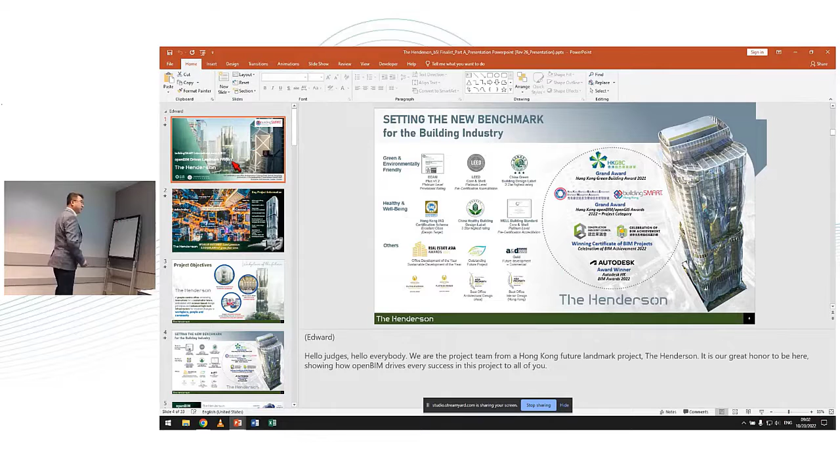We have a big team here in Montreal, and we also have the online team from Hong Kong. I'm representing the property developer and owner of the project building, the Henderson. We also have our close partners here, including our main contractor, our design architect, project architect, and a number of BIM consultants. The building is at a premium location in Hong Kong.

It's at the intersection between the Central Business District and the government headquarters, still the most expensive land in the world in terms of gross floor area per meter square. The Henderson is a super grade A office building, now undergoing construction, and will be a new icon of Hong Kong.

People-centric design and sustainability are the project objectives. We bring many high-tech infrastructures and innovations, with a science-based design for our building. Our ultimate goal is to create a workplace for the future that will benefit not just our tenants, but also their individual staff, and the people and community.

The project has already been widely recognized by many top-tier international, national, and local awards and accreditations at the highest ratings, including, just early this year, the buildingSMART Hong Kong openBIM, openGIS award, as well as some government-initiated BIM awards and an Autodesk award.

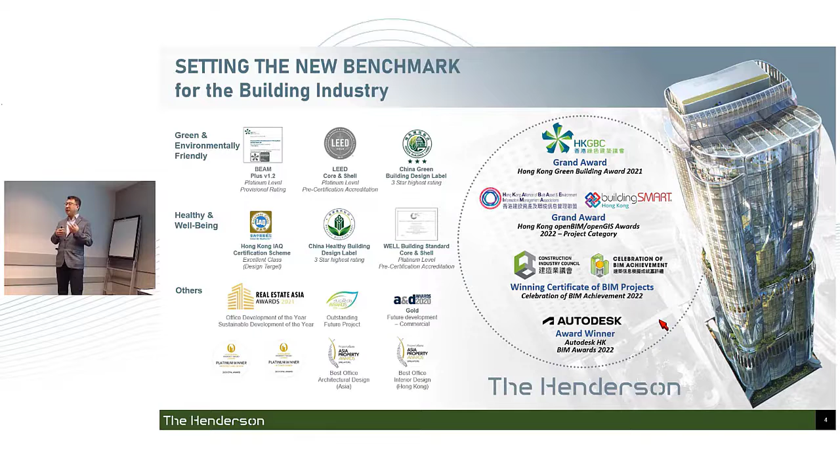Over the past few years, our project team has been conducting many knowledge-sharing sessions and technical talks to industry peers and practitioners as a matter of experience sharing with the industry. We have a strong and big BIM team from the beginning of the project.

The leading BIM consultant was responsible for setting up the BIM implementation plan, including openBIM and a common data platform. The consultant also had to take care of all the sub-consultants focused on different parts of BIM, like the one specializing in DFMA, who worked together with our design architect, Zaha Hadid, here, for the sophisticated double curve curtain wall.

We also have our MEP specialist consultant taking care of MEP design and MEP BIM. We carried forward the 3D and 4D model and all the building asset data and information into the construction stage. Our main contractor, Hip Hing, is responsible for implementing openBIM and bringing together all the sub-consultants, subcontractors, and suppliers to have an integrated BIM model.

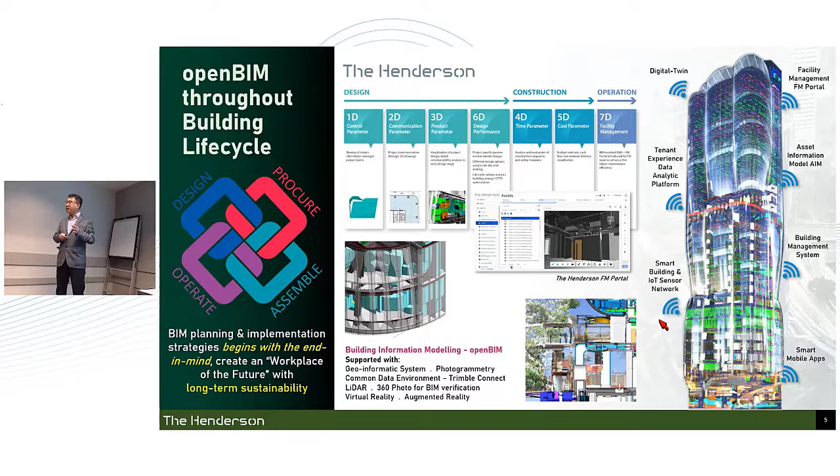The model is not going to end at construction; it will be carried forward and integrated with the digital facility management portal, forming part of the digital twin. Because we have so many sophisticated systems, our digital twin is going to link up with Hong Kong's first ESG partnership program.

Through the system, we can get all the building operation data and even users' ESG behavior data, which we can analyze in our analytics system. That's a loyalty program for future tenants, their individual staff, and our property management. So that's the end of my introduction. Thank you.

Hello, I'm from the architect. The architectural approach for the Henderson is in response to the site conditions. Its organic and smooth language comes to balance and suit the prominent neighbors in the area, with a monolithic object without even one sharp corner.

The tower is elevated off the ground to plug into the network of pedestrian bridges and to create what we call a green oasis at the entrance area, connected to the adjacent park.

To tackle the tight footprint and the notoriously high wind loads of Hong Kong, we had to adopt new technology in the industry: a heat-strengthened, doubly curved, large-scale unitized glazed system. This comes, however, with a whole new set of constraints which we would not have been able to manage without the early and holistic adoption of parametric 3D modeling tools.

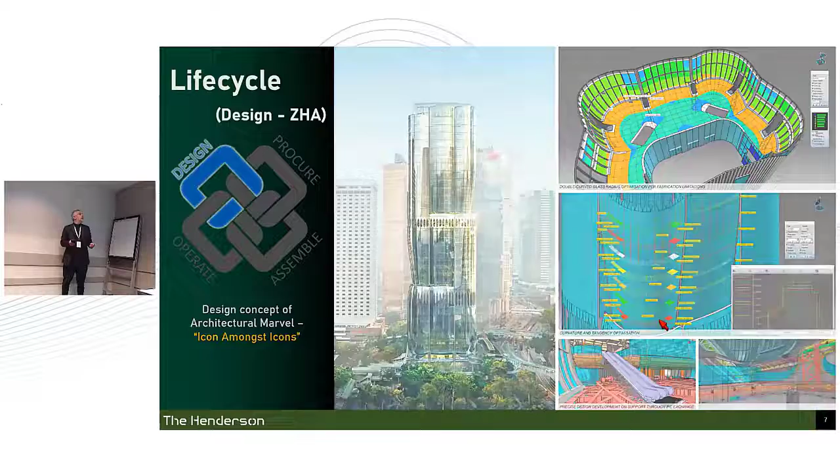The project massing and facade system were fully developed in Digital Project from the early design stage, which allowed us precise control of the geometry and curvature up to manufacturer limits. We could do real-time dimensional tracking and control, adaptive rationalization, and quickly respond to any cost evaluation without the need for design compromise.

IFC format exchange allowed us to work in tight coordination with the other trades, allowing us to design accurately on supportive 3D. Together with our sub-consultants, we developed the whole facade system in LOD 350 for tender to prove its workability and to allow bidders to accurately assess the complexity of the project.

This coordination is ongoing in the construction stage as well. We are currently reviewing and approving well-coordinated shop drawings in LOD 400, and we are still able to react to any ongoing challenges and changes.

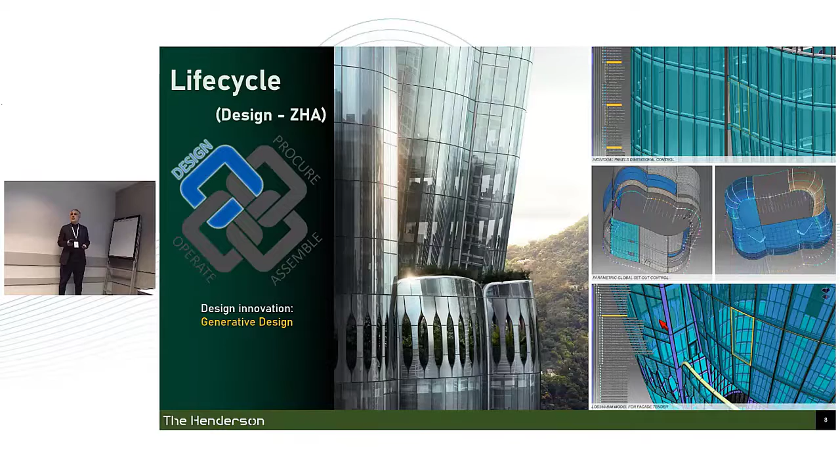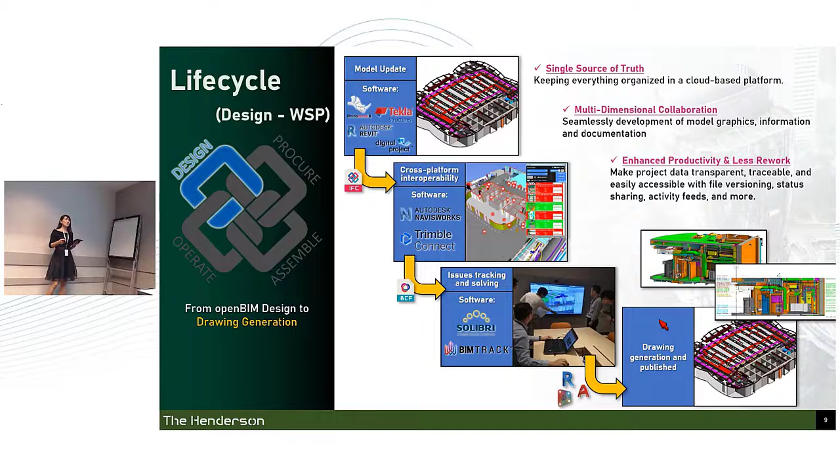From the design stage, building information can be developed with the highest integrity to facilitate direct drawing generation and detailed 3D geometry for future representation use. We hope to maintain a single source of truth with multi-dimensional collaboration, which not only enhances productivity but also enables better project management.

In this project, we comprehensively adopt the IFC and BCF into our daily coordination. The team is very confident with the exchange schema, which is governed by buildingSMART with the IDM.

Before the project starts, our BIM manager will begin with the definition, the model view definition. That is to design what elements are to be used, what is to be included, and the exchange format as well. Then it becomes our project standard, followed by all project members.

This process recurs, and the information model will finally become an asset information model. The maintenance-related information will be extracted from the COBie and then imported into the FM portal.

Here you can see the project team has adopted five different native modeling tools ranging across different disciplines. Since the project team was already educated and guided with the openBIM strategy from the very beginning by our BIM manager, the team can define suitable software to be used at different stages towards an openBIM approach, and the selected native software must support information exchange of IFC version IFC2x3.

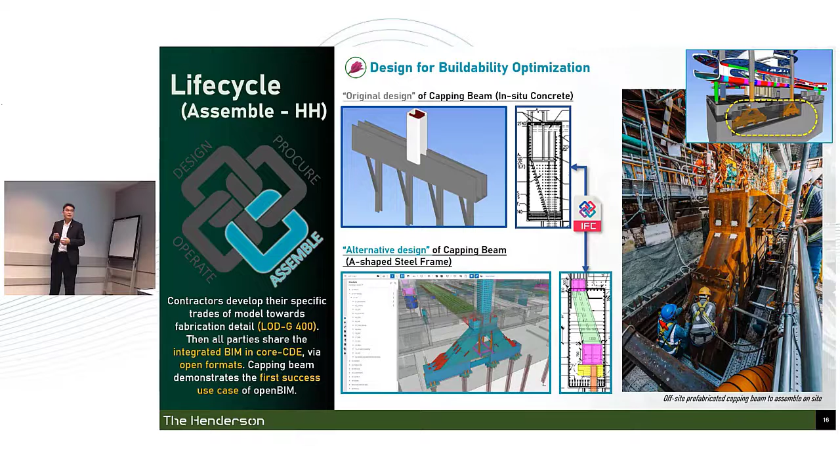The counter-proposed model is also interoperable with other platforms for reviewing and providing seamless communication. As a result, our construction time for the capping beam reduced around 20%, with equivalent loading performance, but easier workmanship and higher construction quality.

Our next showcase is the collaboration interfacing between the steel structure and reinforcement bar. We have the typical detail for rebar as normal practice, but in our projects we have steel structure in each floor.

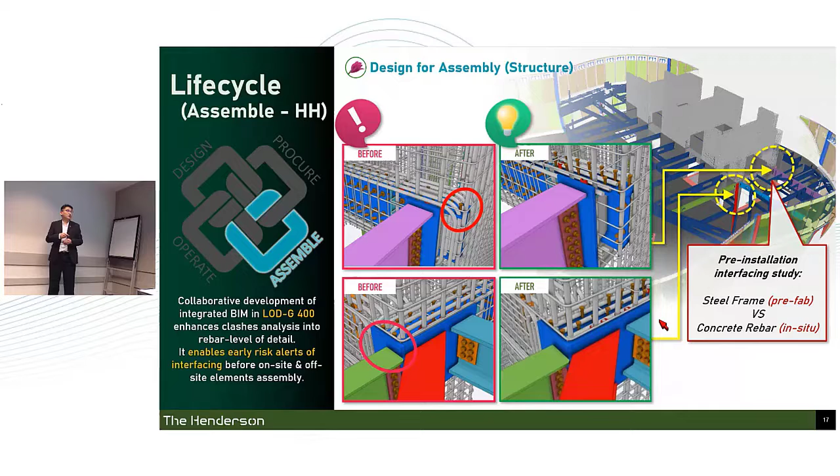We took use of the fabricated steel model in IFC format to review with our rebar model in the CDE platform. Our engineering team found that some rebar clashed with the steel structure, so we redesigned the detail before construction. This reduced a lot of abortive work on site during installation.

Next is about headroom. The clear headroom is very important to our Grade A office in a central business district. In our team workshop, we frequently work with our subcontractors to review the design to strike the balance between our buildability issue and

maximizing functional space. The IFC model allows us openBIM consolidation of models from all parties, enabling regular discussion and avoiding remodeling and discrepancy. As a result, you can see that most of the MEP routing fits into the floor truss.

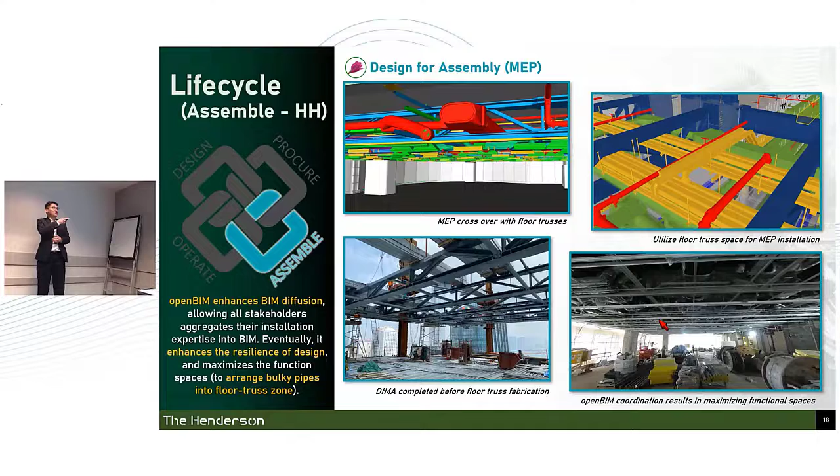The first one is automation. Apart from the API and the Dynamo application, the IFC model allows us to have more options to choose and fulfill our statutory rule checking, such as using Solibri for our staircase checking.

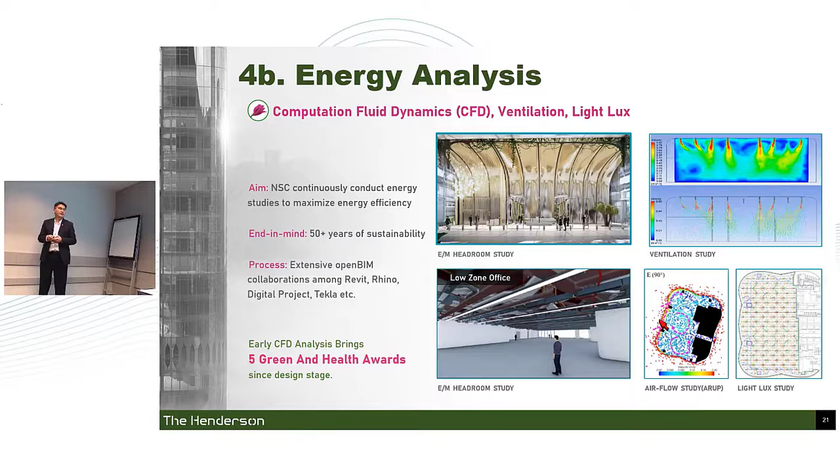Our consultant team and subcontractor do a lot of energy analysis to fulfill future occupation quality. They can embed their knowledge into the model, and the model is also interoperable between the design and the analytic software.

Based on the federated IFC model, we succeeded in modeling around 70% of irregular facade curbs, which reduces around 30% of construction time.

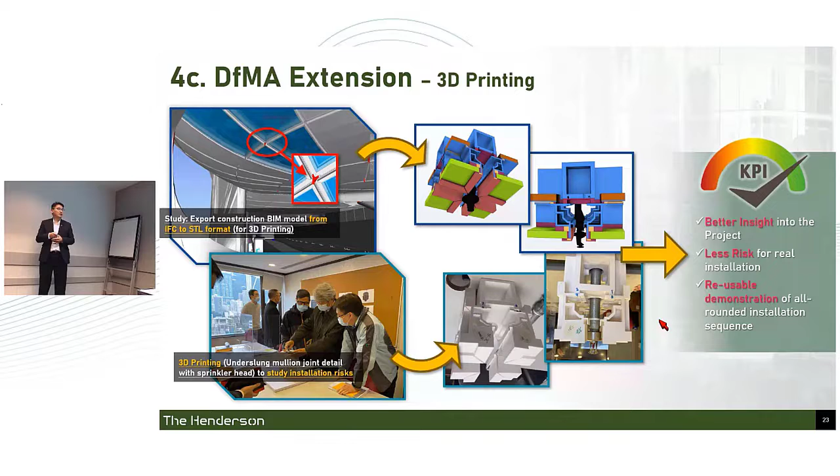Our model is also converted to a 3D printing machine, and the 3D printing model allows us to have more interaction with our project team to create a better insight into the project.

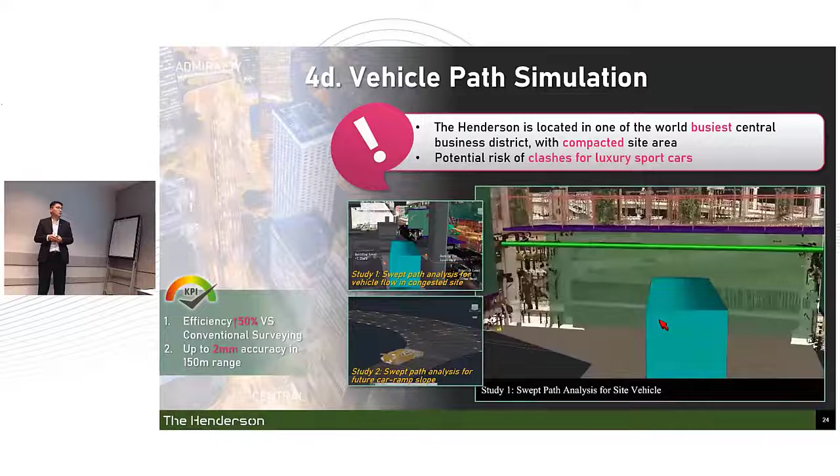To achieve a smooth driving path, our model is converted into vehicle swept path analysis to provide smooth vehicle movement.

Thank you, Kane. In the Henderson, we adopted 3D laser scanning to obtain precise data for steel construction. This precision comparison,

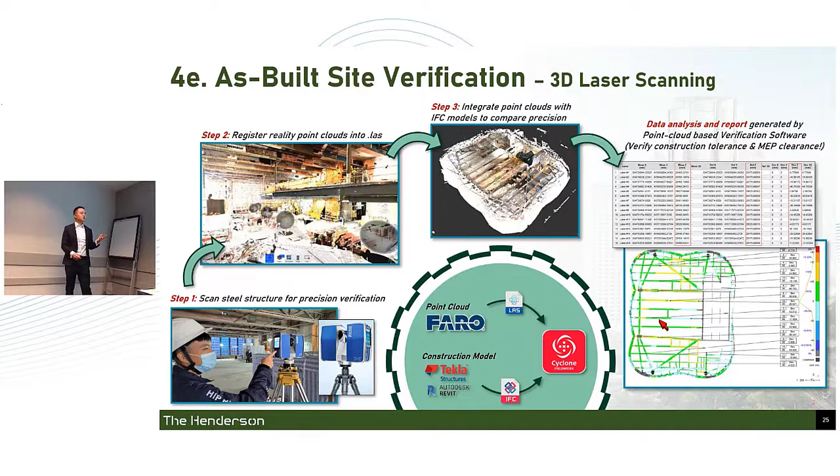to begin the precision comparison, we have to collect the point cloud model along with the virtual construction model by IFC format and import them into the Cyclone. This comparison is essential in our projects because the steel construction highly determines the future construction assembly tolerance and the MEP clearance.

To enable digital twin as the model for FM users, we initiate dynamic BIM collaboration from office to frontline. To achieve this, we provide in-house workshops for our site workers to adopt AR software.

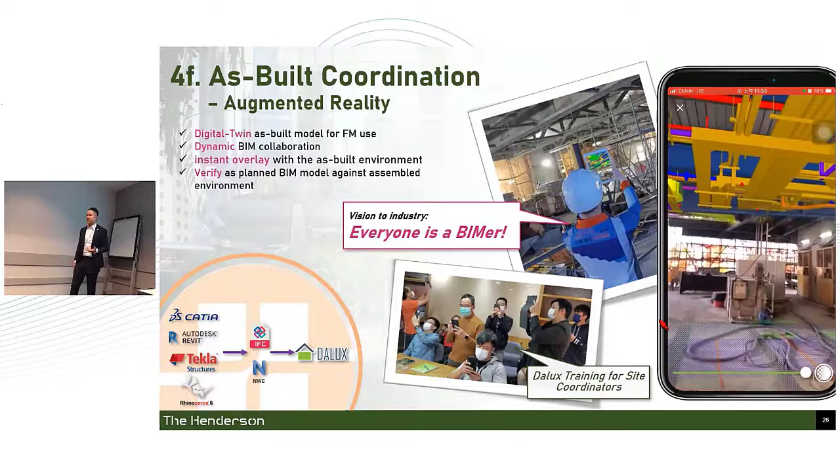Before the MEP installation begins, our building service coordinator frequently makes use of this function to plan out the MEP installation with the site workers. From their feedback, they find it really handy, especially the instant overlay with the as-built environment, so they can verify the information they're looking for.

We also make use of this function to verify the as-planned BIM model against the assembled environment to make sure everything is going as planned.

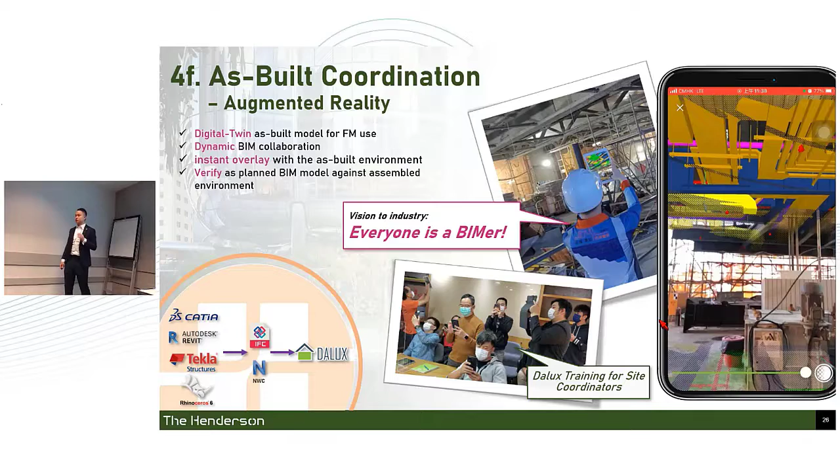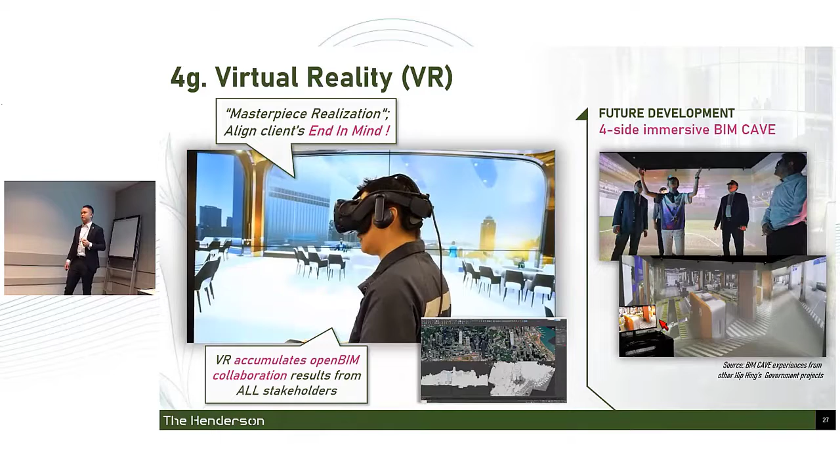To enhance it furthermore, we can implement BIM CAVE in the future, which allows stakeholders to collaborate seamlessly.

In the beginning of the project, we found it very difficult to obtain the site surrounding area information. So to tackle this pain point, we took the initiative to learn GIS to see how it can help our projects. This aspiration actually came from the buildingSMART Hong Kong chapter.

They have been working hard to promote openBIM and openGIS integration in Hong Kong. We are also working along with them with the aligned vision. Thank you, and I will pass it back to CC for conclusion.

Okay, so you have been hearing a lot of our BIM strategy so far, but adopting BIM in the project is not easy. So we would like to share with you guys some of our difficulties during the collaboration by using BIM. At first, we observed some data loss or mistranslation across different software.

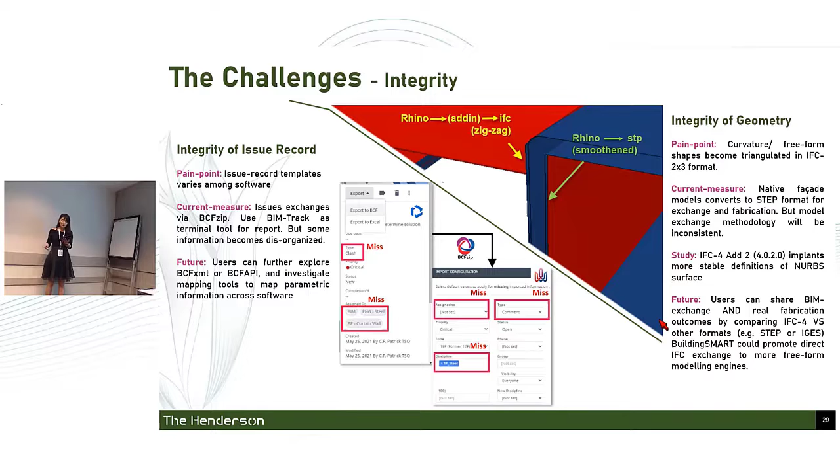Another challenge is related to the issue record. Because we were using the BIM track as a methodology for the report issuance, as the template is different among all the software, some of the configuration may be lost while exchanging via the BCF zip and become disorganized. So in the future, we hope to further explore using the BCF XML or BCF API for better information mapping across the software.

And in this project, we have been cooperating with over 25 project partners from local and abroad, and all of us possess high competency in our construction specialties. So with openBIM, it not only facilitates smooth exchange of data between all the parties, it also allows us to have a better collaboration around the world, especially under COVID-19 for these few years.

During the project cycle, we have implemented a lot of software with different objectives. openBIM allows us to select the right tools for the right task at the right time.

And finally, we are confident to tell you that our openBIM strategy over the delivery process will certainly contribute to future openBIM development, including the workflow. It also eventually brings us to witness the completion of the Henderson, a new landmark building in Hong Kong. And we believe that this project has opened a new chapter of openBIM and acts as a role model to guide the industry to use openBIM in Hong Kong.

We have devoted many efforts over the past 5 years. Now it's time for us to share the experience and honors with everyone here. And that's the end of our presentation. Thank you very much, and we hope to see you again next year.

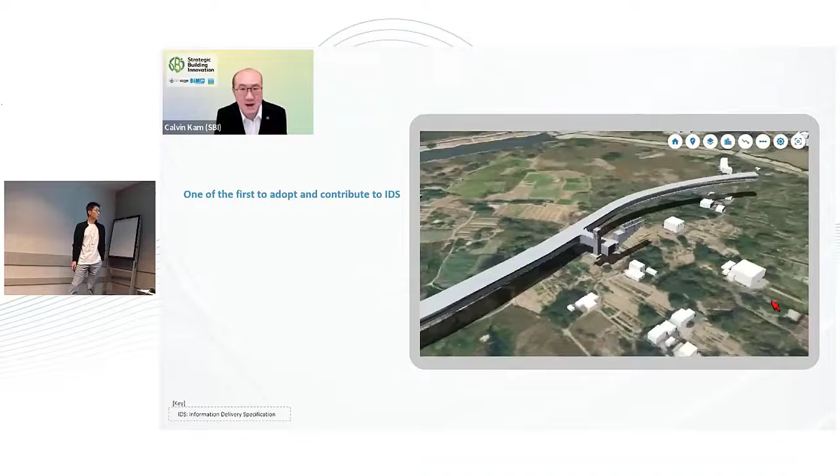But before we start, Calvin Kam, founder of SBI, has prepared a brief introduction to the project. Thank you, buildingSMART Awards Program, for giving our global project team this opportunity to present our submission under the Handover category. This submission is one of the first to adopt the new buildingSMART Information Delivery Specification, IDS.

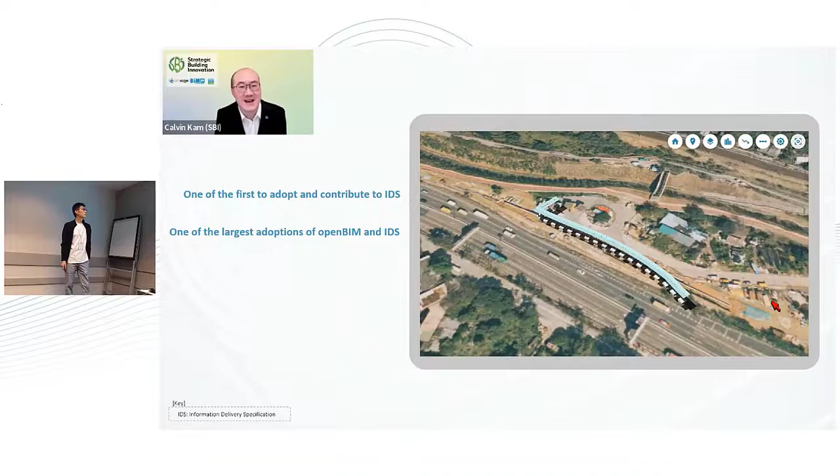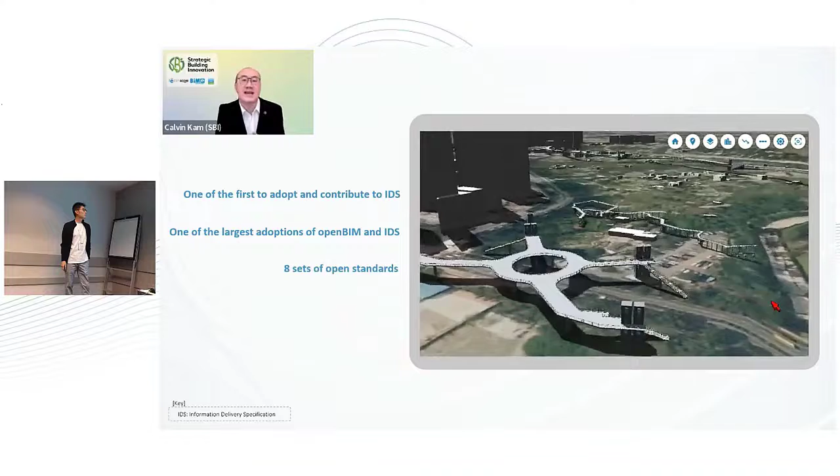This submission is about one of the largest adoptions of openBIM and IDS at an urban city scale. It's about the use of 8 sets of open standards working together in an ecosystem to ensure open standard driven, smarter city management.

In fact, our project team has a track record of over 20 years, whether working with the Finland government 20 years ago with Senate Properties, or working with the GSA 18 years ago to adopt IFC and MBD, or in the last 2 years working with the Hong Kong Lands Department. It's about pioneering openBIM applications and proving the value propositions.

In our case, we are not only the first to adopt IDS, but we are also actively contributing to the development and feedback loop of IDS. It's about the largest adoption of openBIM and IDS, designing beyond a single project, beyond one building or one piece of infrastructure. It's about getting ready to handle up to 300,000 project information models in the future. We are designing this infrastructure to be future bulletproof.

At the same time, it's beyond just IFC and IDS. We are working with a total of 8 sets of open standards, including OGC, the Open Geospatial Consortium, and CityGML, so that this ecosystem of open standards allows us to streamline open urban information as well as open building and infrastructure information. At this time, let me pass it back to Dr. Min Song to go through the project detail.

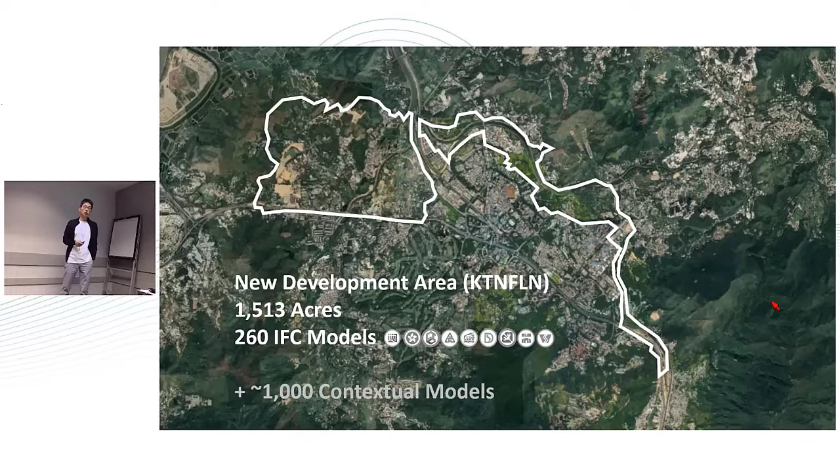Within that area, we had initially 260 IFC models coming from different works departments. But those weren't the only models we had. We had around 1,000 contextual models to give context in the GIS map. If you look at the whole area on screen, that's roughly 1,513 acres.

Going into the openBIM information, with that first batch of 260 IFC models, the government agency first published a BIM harmonization guideline. The downside is it's a human readable document that computers cannot understand. With this written guideline, you cannot precisely and digitally define your specification and check models against it. There's also room for human error, since people have to understand the written guideline and implement it into model checker software, and results may differ between people.

So that's when we turned to machine readable specification - IDS, the new standard established by buildingSMART in 2022, version 0.9 at this point. The intention of this standard is to make machine readable specifications interoperable between different stakeholders and BIM tools, so you can generate a specification from one tool and export it to another for model checking and other purposes.

Because today we do have machine readable specifications - it's nothing new - but it lives inside one piece of software that's not exported to other software.

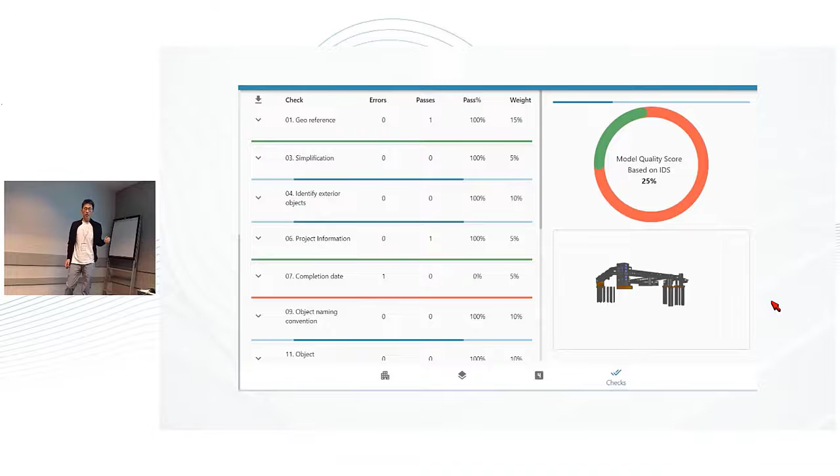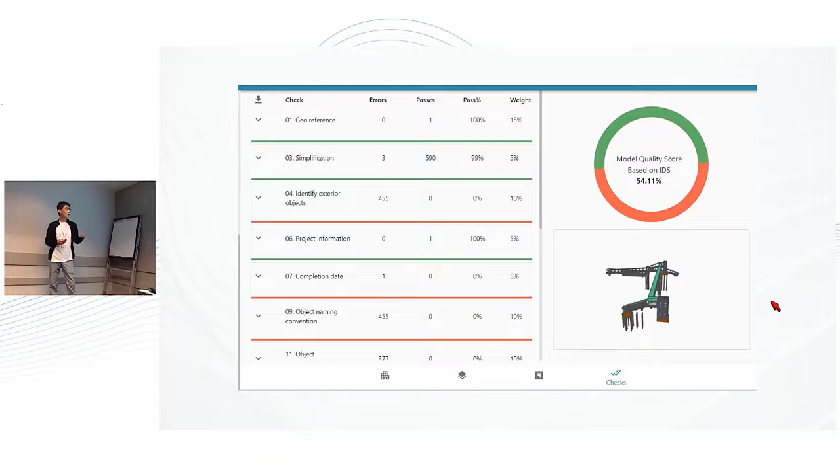This is the IDS checker that we developed after coming up with the XML format. It runs checks against IFC models, and here are some of the checks we implemented. It has high-level checks like construction start date and construction end date. Georeferencing is also important because you have to automatically locate the building in the context of the map.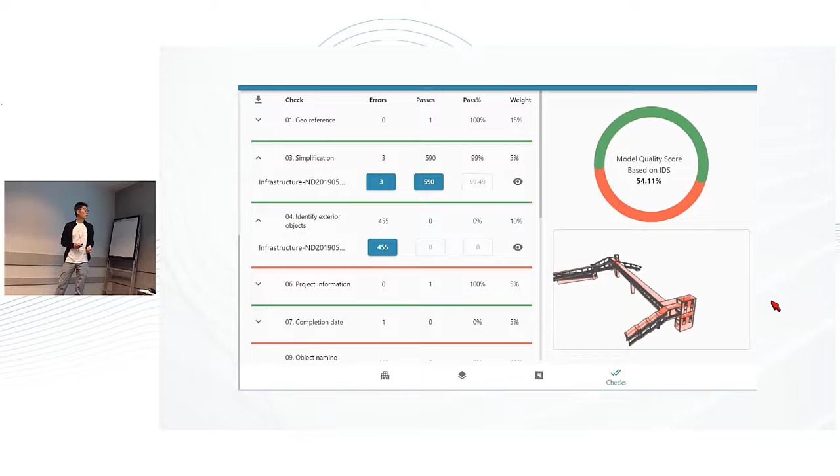After this IDS checker was developed, we tested it with 149 IFC models - building projects and infrastructure projects were tested. The maximum score you could get for an IFC model was 300 points, and the average score across these projects was around 150 points. Building projects scored higher compared to infrastructure projects, as you see here, mainly because today we have a very good definition of IFC structure for building projects, but infrastructure projects are lagging a little behind.

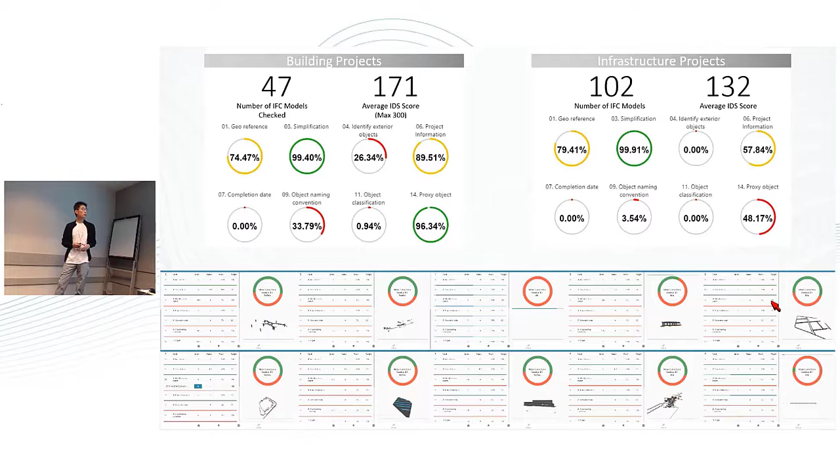We are also hoping to see IFC 4.3 in the future, and when that comes out and software implements it, and if there's an export engine that successfully exports IFC 4.3, we expect infrastructure project IDS scores to go up in the future.

The time it took to check each of the models was also pretty quick, around 20 seconds down to 12 seconds. Even with a fairly large project like the one on the left side, with 2,500 3D objects, it took around 10 seconds. For very large models with 100,000 3D objects, it does take longer, but on average it took maybe about 12 seconds.

Stepping back a little bit, a 30,000-foot view of our architectural system. The IDS checker using the open standard is here at the top, and the BIM data repository GPDR that I mentioned is this gray box at the bottom. But it's not only the IDS checker that we use open standards for.

We used, like Calvin mentioned, 8 sets of open standards or solutions. CityGML was one, the openGIS format. Then GLTF for data streaming to simplify the geometry and make that extremely fast, that is also an open format. And 3D tiles, that is also an open format.

BCF was used to communicate the check results with the authors. Then buildingSMART data dictionary, this is something not implemented or tested yet, but we plan to use this in the future when the IDS standard is mature enough to link the data from the BSDD. So you can see a lot of open standards were used, and this is possible because there is great support from the government agencies. Next, Christina Bloom from Architectural Services Department will explain government support for the open standards and implementation.

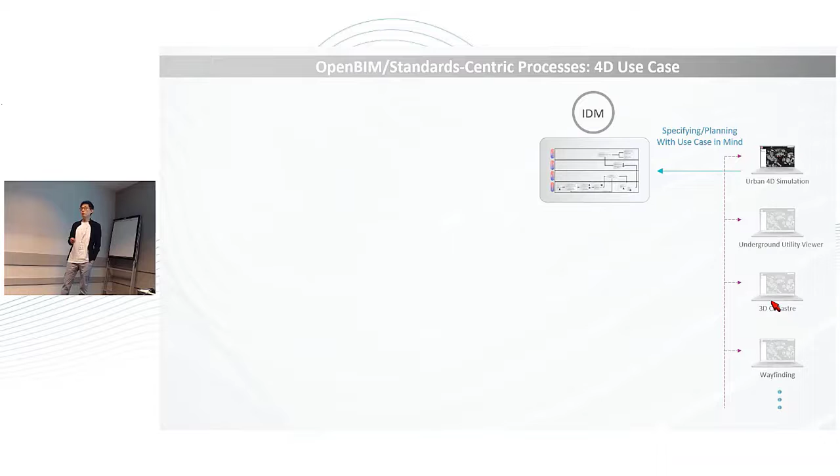Before developing this application, what we first did was identify the processes and information exchange between different stakeholders. Based on that, we really thought about the IFC entities, property types, and the values within the IFC model that would support the 4D simulation and openBIM and openGIS integration.

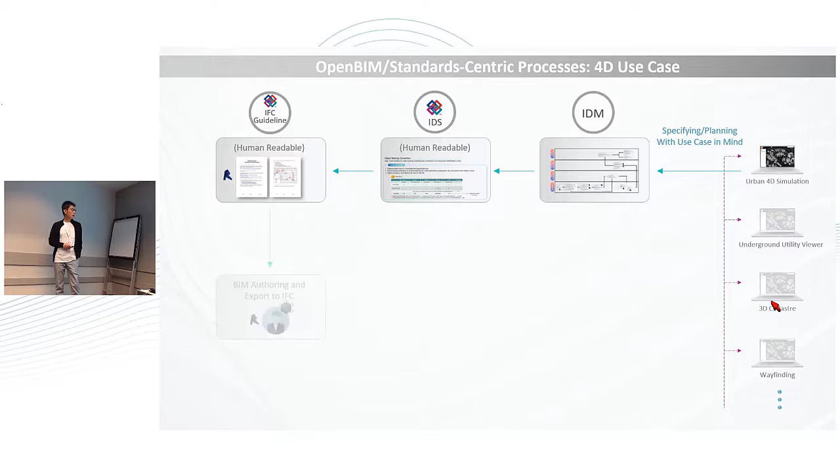Once we had that human-readable specification in place, it was also used to author an IFC guideline for Revit users, so that you can export IFC entities, properties, and values correctly from the Revit tool. The IFC guideline was used by the modelers to generate the information required for the 4D simulation.

The IDS in written format was converted into machine-readable IDS XML format, then imported into the IDS checker for checking IFC models. If issues were found, BCF was used to communicate those issues with the authors. When the IFC model is in good shape, it was handed over to the government BIM data repository.

The repository used additional open formats and standards for streaming the data. In the end, when the IFC models had all the required information items for the 4D simulation, that was materialized into the 4D simulation application.

So that is a typical workflow, but this is something applicable for other use cases that you see on the right side. This is the demo of the 4D simulation application.

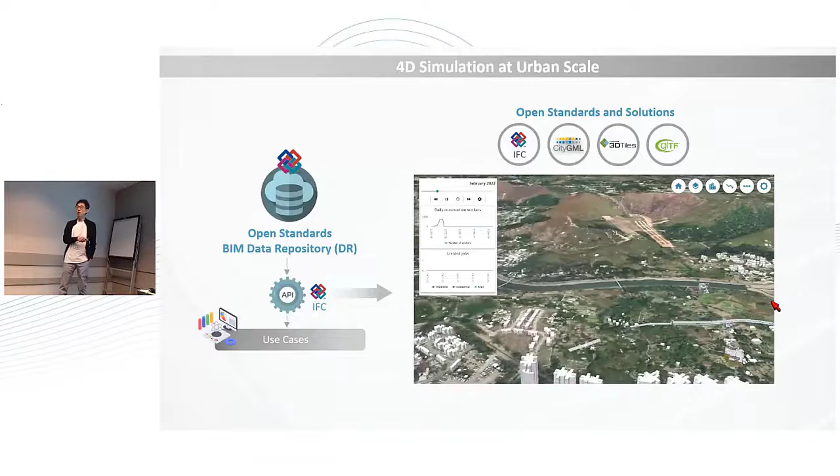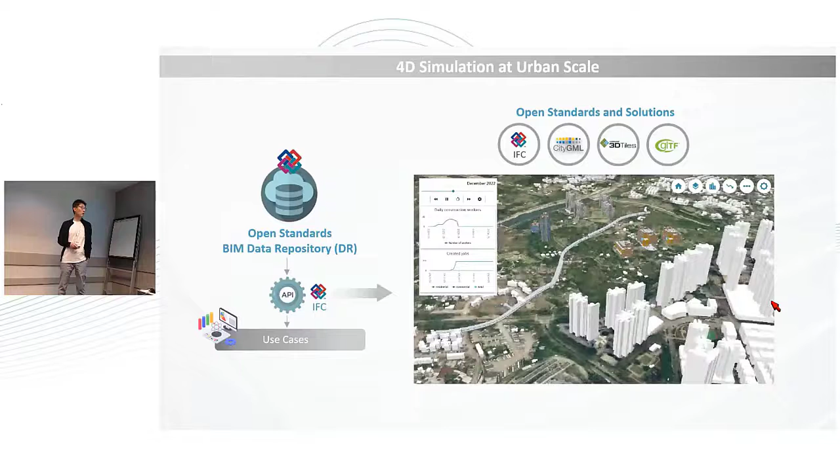You see the coefficient metrics on the graphs on the left side, like the number of workers needed per area, number of jobs created per area, linking coefficient metrics with the IFC slab, the area coming from IFC slab, and the total built area, and so on.

So, in summary, the IDS project used a set of open standards, not only openBIM, but openGIS and other open formats for streaming data. We developed 10 machine-readable specifications based on the new buildingSMART IDS standard, which were imported into the IDS checker we developed to test the models.

We used 149 IFC models in total, 47 building projects and 102 infrastructure projects. The time it took to check each model was pretty quick, about 12 seconds.

Overall, the objective of the IDS project was to make the data repository scalable, serviceable, and shareable, so that the handed-over IFC models meet the requirements for the GDDR, and ultimately give ownership of the data back to the client, the government agency, so they can archive, see the details, and develop applications from it.

We also wanted to make this process repeatable. If you have a GDDR with 300,000 IFC models and use proprietary APIs to build applications, that would be very difficult, with different documents and SDKs for different software. But when all models are based on IFC, there's only one IFC API you need to study to build applications.

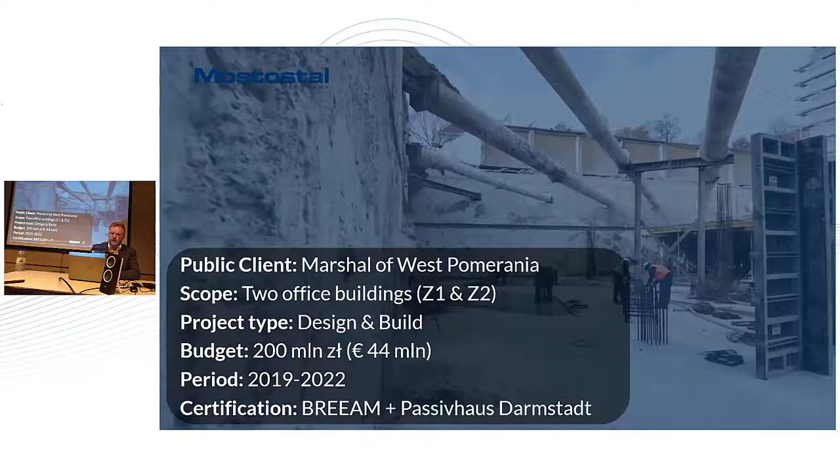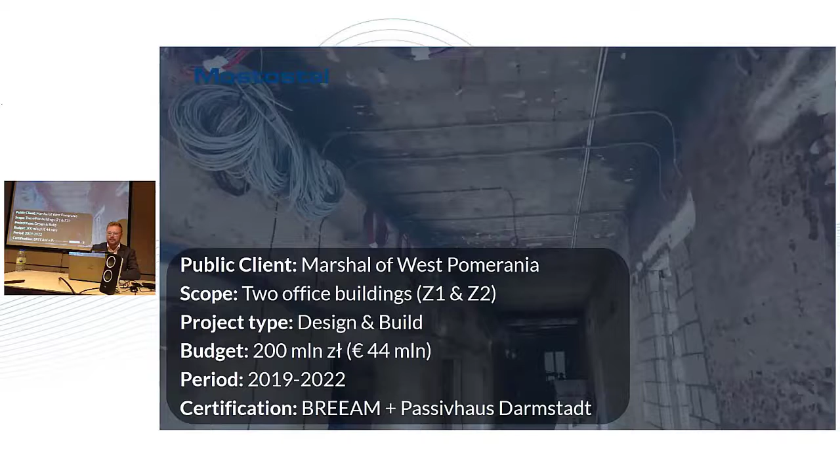Here you can see our project, Urząd Marszałkowski in Szczecin, built for a public client. It was a design-and-build formula, divided into two stages: the first was deep renovation of an existing building, and the second was new construction of a passive building. Both buildings required sustainability certificates.

To fulfill the client's needs, openBIM was used to reach sustainability goals. By using the openBIM framework in the design and construction processes, all sustainability and energy performance requirements were met. The client also required preparation of an as-built model and development and implementation of an FM platform for use.

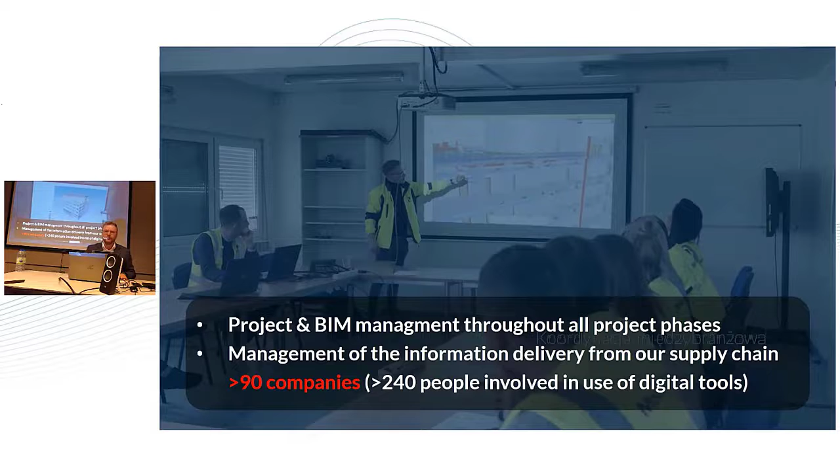Enough of introduction and goals, let's jump to the practice, to the construction site where all the work is done. I'd like to invite you to Szczecin, Poland. Construction sites are generally conservative environments following traditional approaches to working, but over here we are pushing the boundaries by using openBIM to improve our way of working, and I will show you some methods and digital tools we used to achieve that.

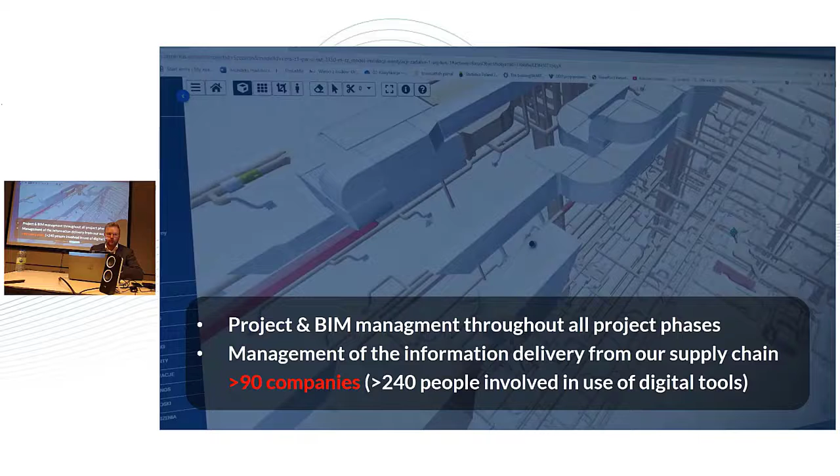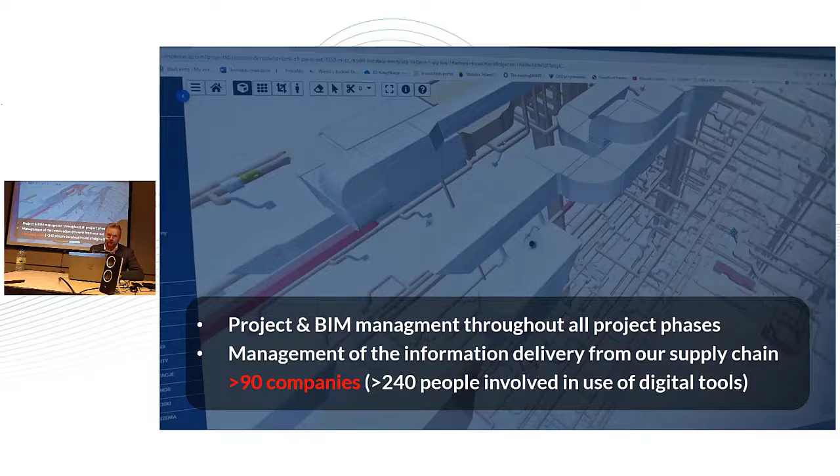As a general contractor, we manage the BIM processes from design until the handover stage and coordinate the work of multiple entities. In this case, more than 90 companies were involved in the project, including construction companies, designers, and suppliers. We also had more than 240 people involved in using digital tools.

From the very beginning, we had this idea that a finished product should be adjusted to the desired client needs, even if those needs were not well articulated. In this project, we realized to meet clients' expectations, we need to extend the BIM usage above and beyond the basic requirements that the client set up for us. Based on our earlier experience, we implemented extra BIM uses, and in today's presentation I will focus only on those required for proper handover.

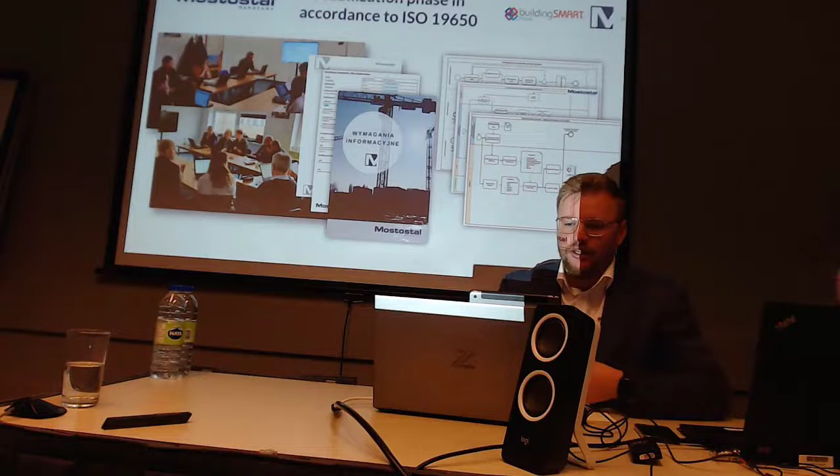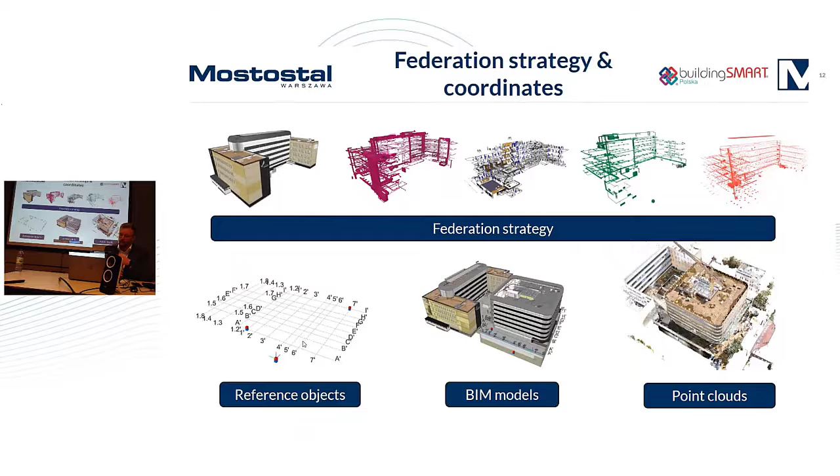So the next thing is that we also prepared a federation strategy and set up a coordination system for the models, and also prepared an implementation plan. We also defined modeling requirements and machine-readable information delivery specifications, which were later used for model setup and quality control.

Here you can see an example. We use internal classification in preparation for the FM platform. Also Uniclass, because the client required this, and it includes all the properties that needed to be implemented. And here you can see how it was done.

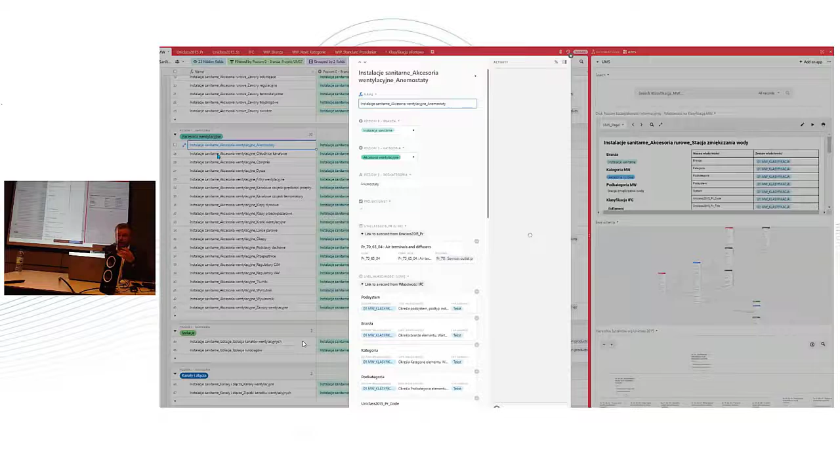We used the Airtable platform, which is a database software, we can say something like that. So we prepared our database. Thanks to this, we could have information requirements always available and up to date. And there you could see export to PDF, and also it was prepared for XML export for native software like ArchiCAD or BIM Collab for project.

Okay, so now I would like to go over the biggest challenge that we took on at our construction site, especially during the construction handover phase. It's about correct data acquisition. While the general process is simple to say, design, build, and operate, in practice it has been difficult to accomplish, especially during the construction stage, where it's challenging to coordinate the works on-site itself.

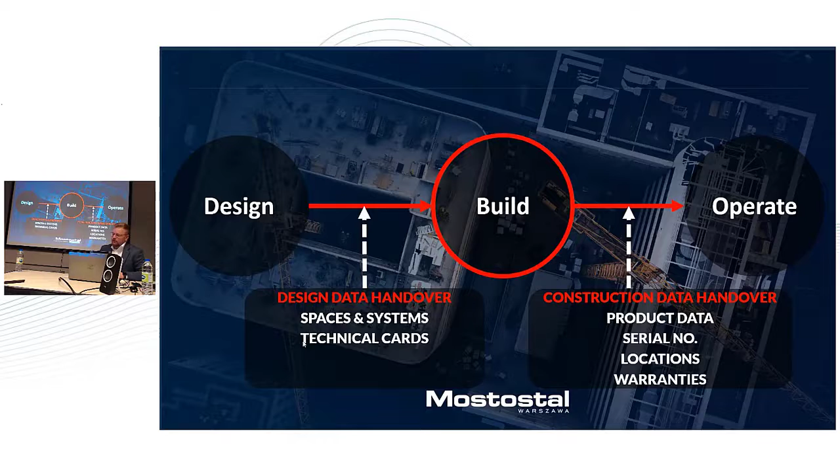But we developed some techniques to directly tackle this problem. And as I mentioned, we were responsible for the coordination of work from the design to the operate phase. Firstly, let's focus on the design stage and design data handover, which is part of the handover through the whole process.

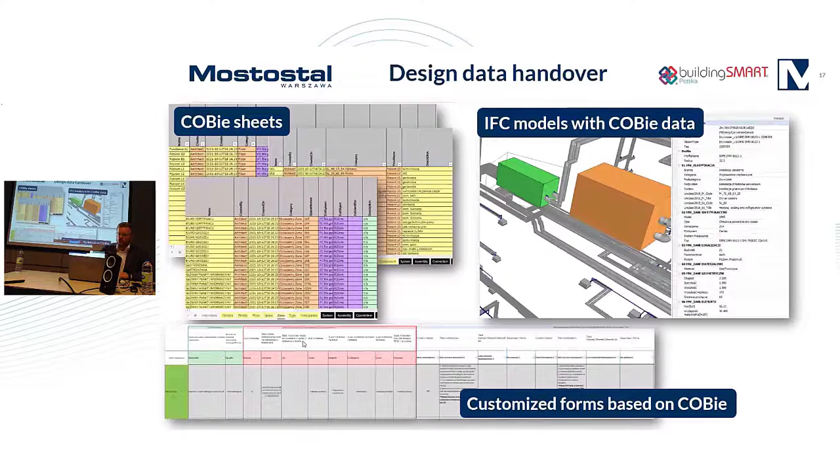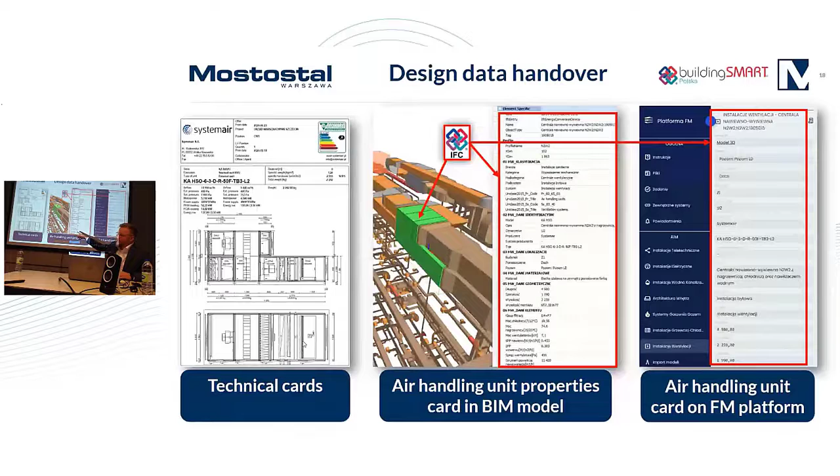The COBie format helps us to properly structure the data in the models, and not only in the models, because we used this data also during construction, which I will show you later. Designers extracted information from the technical cards and inserted the information directly into the models, and it was later used in the FM platform.

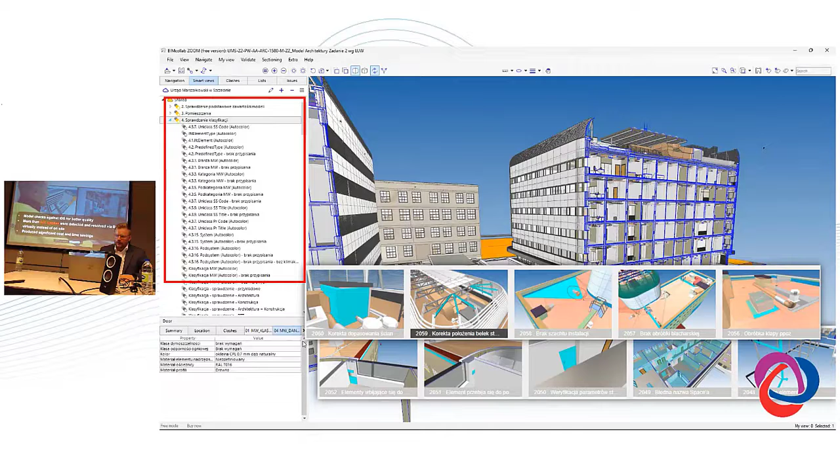From the beginning of the project, we also placed a strong emphasis on the quality assurance and control of design, BIM models, and data. We regularly performed quality control checks in terms of information requirements and COBie data. All issues were communicated using the BCF format by using the BIM Collab platform. And we managed to detect more than 800 clashes and resolve them virtually instead of on the construction site.

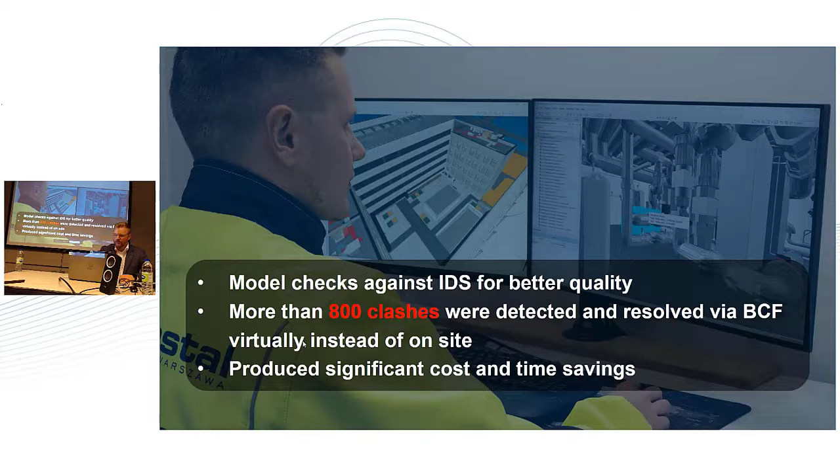Next, on site we were using a Dalux platform with access to the documents, all the documentation on site. Because of that, we reduced the risk of working on outdated documentation and improved access time to documentation to just a few seconds. This was especially crucial here because the construction office was located more than 1 kilometer from the construction site.

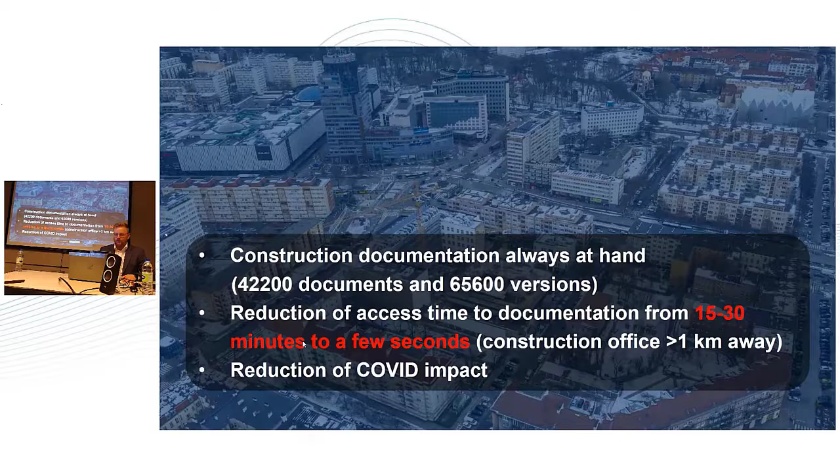That's why we also bought bikes for the construction staff on this project. It's not a joke - in one day, the project manager did more than 20 kilometers on a bike. I haven't mentioned this before, but construction was done mostly during COVID, which in the case of construction is more problematic than, for example, online selling or software development. So we also reduced the COVID impact because of implementing those kinds of solutions.

What we learned during the process: it is better to divide quality checks into sub-stages in order to bring crucial information to the site at the right moment. It needs to be checked more often in an iterated process. Also, COBie should be treated not as a final deliverable, but as a format to start the project with.

Our biggest challenge was construction data handover. Capturing data during construction is much more complex because there are many more people and many companies, each creating a small portion of the project data to be delivered. We had more than 90 companies to coordinate, and rather than just handing over the information from the execution stage, we aimed to properly understand the client objectives. We wanted the client to be able to use the collected information and documentation from the very first day of operation.

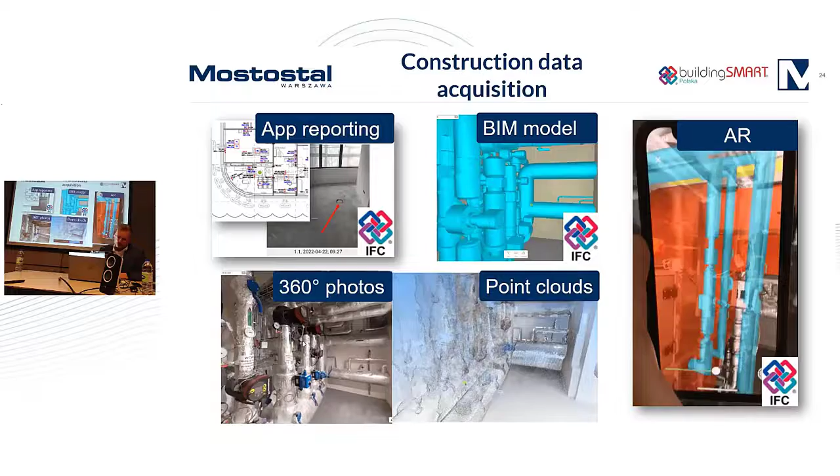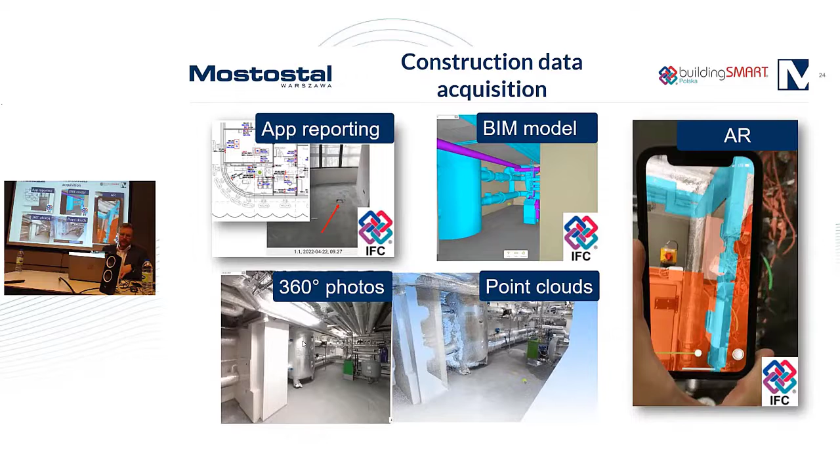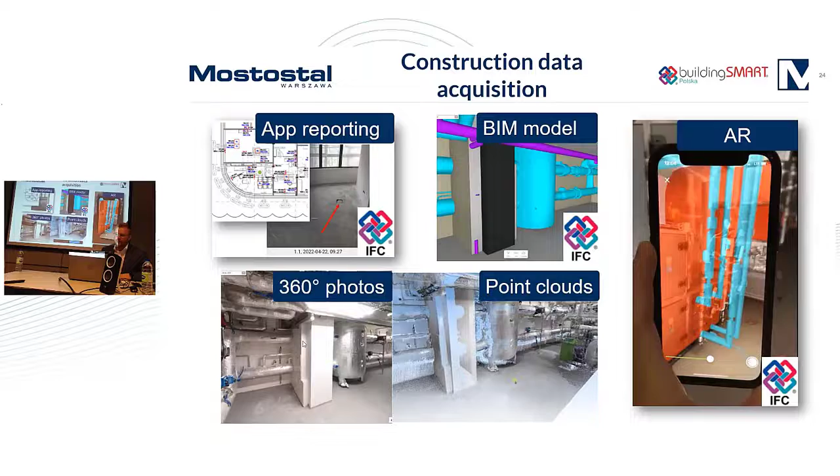In order to deliver an accurate as-built model, we implemented a series of methods. First is as-built changes registered on Dalux, which allows subcontractors to register any changes spotted on the construction site, and it was for workers on a construction site. We also used 360 photos, fast laser scanning, and BIM models, and we tested augmented reality on this site.

Here you can see an example of use of the Dalux platform, where we had a digital form for data collection. A subcontractor could select a location or BIM element, take a photo of a serial number, and send it to us. After this, we could combine that data and use it in the FM platform.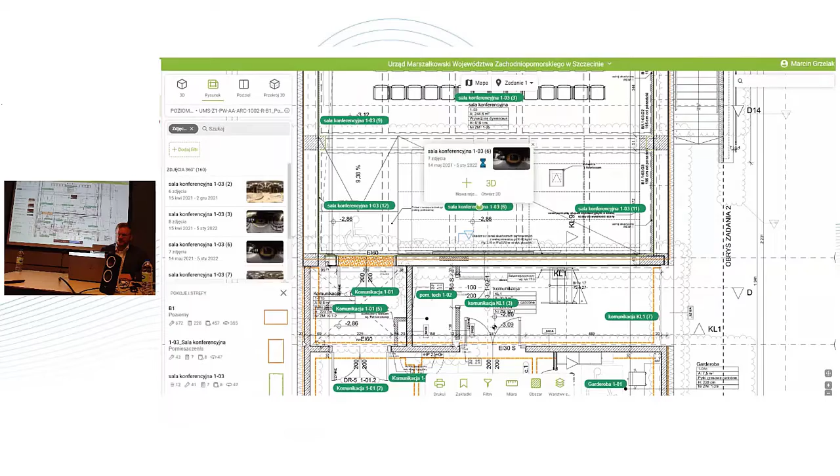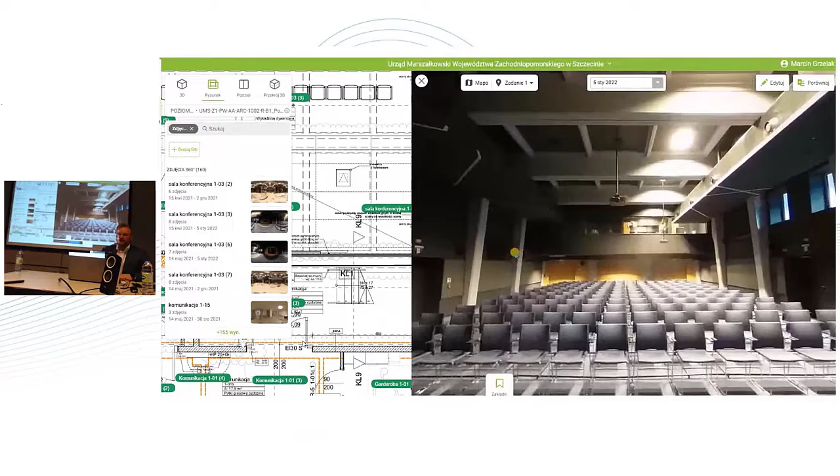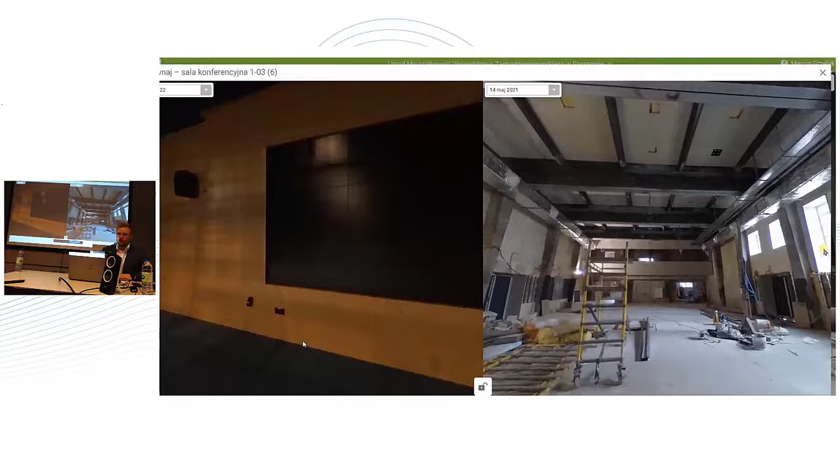Next is the use of 360 photos. It allows us to reduce the time needed to capture reality and support as-built model verification. It was also used during coordination meetings and supported decision making a lot, especially during COVID. We also used these photos for progress tracking and payments to the subcontractors.

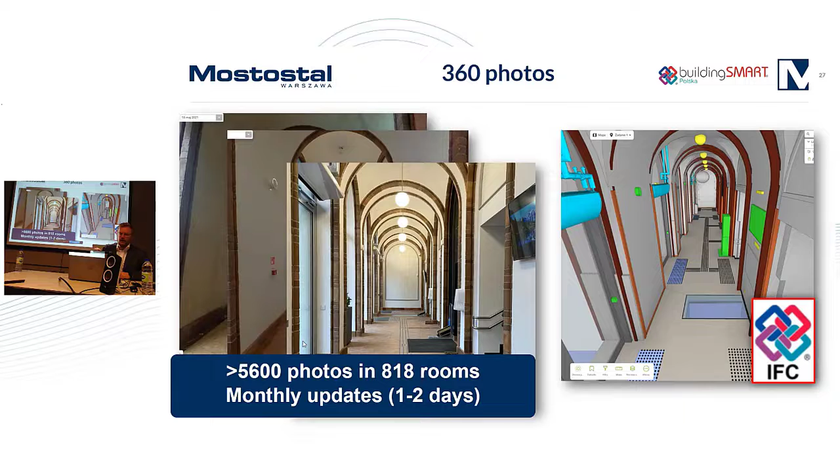All of the 360 photos were available for all of the workers, and they could compare this with the IFC models directly in the CDE platform. We took photos at least every month, taking a total of over 5,600 photos in over 800 rooms.

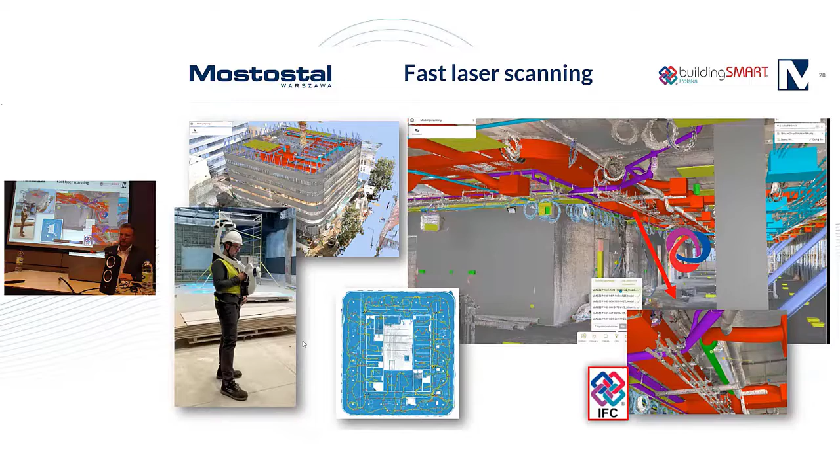The next method is laser scans and point clouds. Using that kind of scanner allows us to record changes, especially in complex areas such as the boiler room. We communicate these changes to the designers and subcontractors in the online environment in Dalux by using BCF.

And we didn't stop at this. During that project, we tested AR solutions like HoloLens. We believe in the future it will help with planning works and avoidance of mistakes, instead of looking for changes on the construction site.

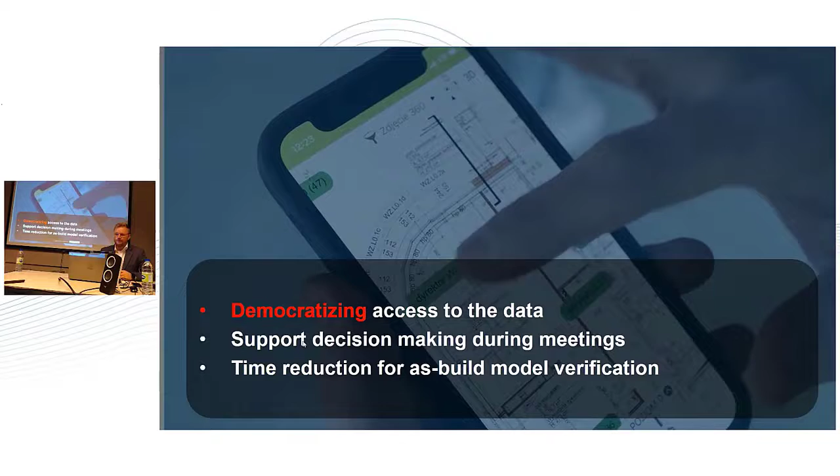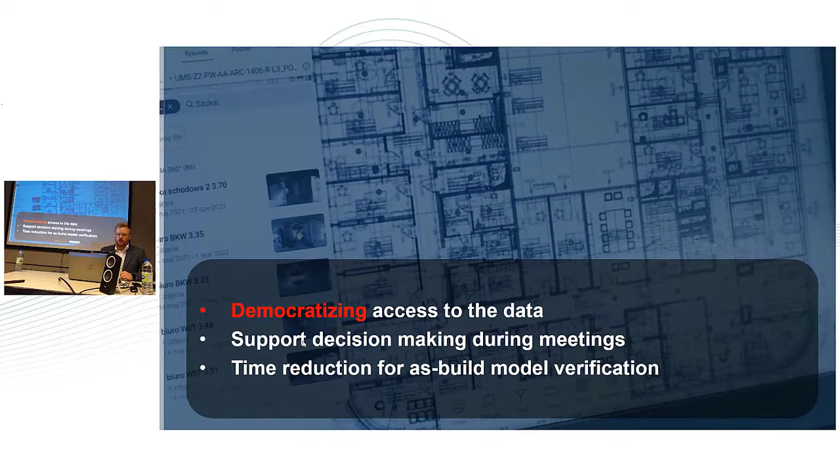To summarize, all of the tools, combined with the IFC models and documentation, allow us to democratize access to the data. Every project participant can contribute without additional costs by working in an openBIM environment on the CDE platform. This removes the BIM implementation roadblocks, especially for those taking their first steps in BIM methodology, including the client and other small businesses.

So handover was redefined from a single event to a process throughout the design, construction, and commissioning stages. Here you can see part of this was digital commissioning.

We took the initiative and convinced the client to conduct the digital commissioning process instead of using papers and emails. The client could focus on inspections and quality control rather than bureaucracy. Each defect was clearly communicated with a proper location, photos, and description. It helped us register and manage all the defects and forward them to our subcontractor.

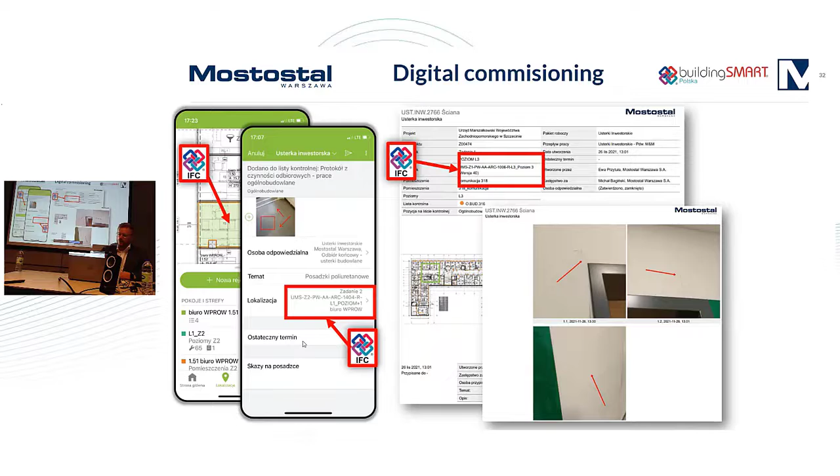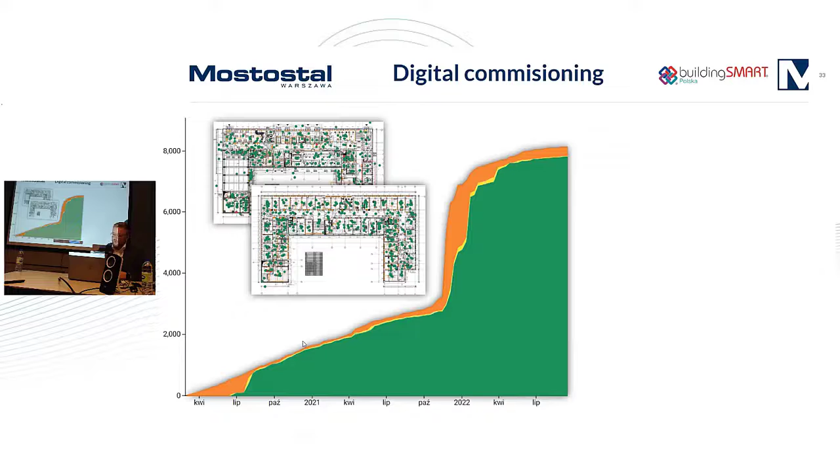On the graph, you can see performance through time. From my experience, the graph looks very good compared to other construction sites because it showed collaboration between subcontractor and general contractor. The orange tasks are assigned to the subcontractors, and when they respond to us and we close the issue, it turns green. This line shows the communication during construction, and the subcontractor could check all the issues in a given room by using QR codes.

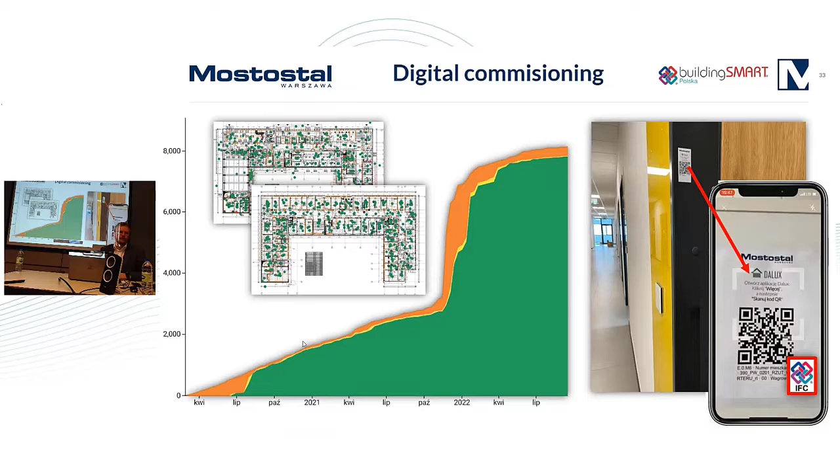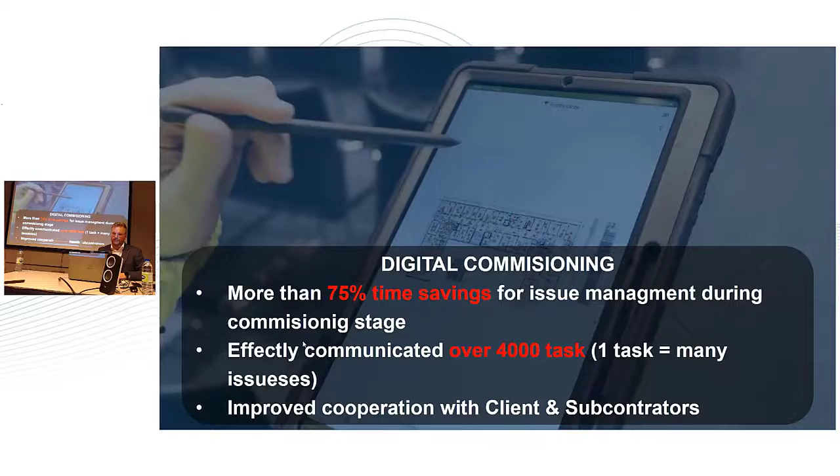To summarize, digital commissioning allows us to efficiently manage the defects as well as efficiently remove them. We communicated over 4,000 tasks, and one task is more than one issue.

This is it. And second and last thing: the client required design and implementation of an FM platform consisting of 4 modules: AIM, CAFM, CMMS, and EMS.

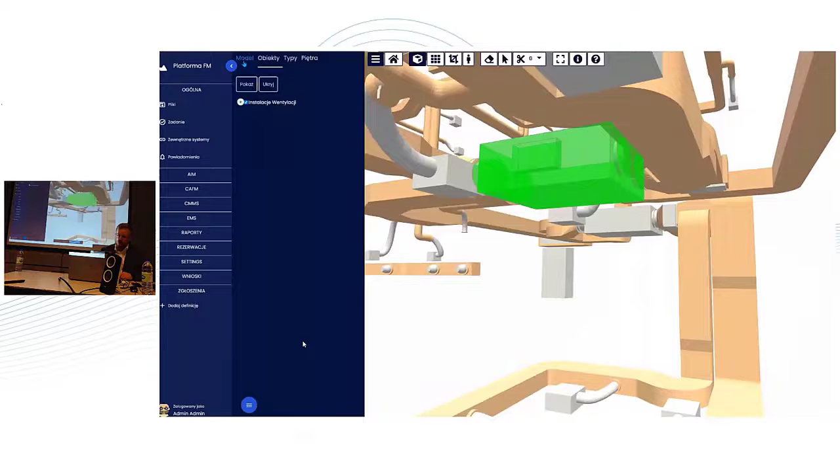Along with our partner, Promar, and the future facility manager and users, we designed a platform. Close cooperation allows us to better understand the client's information requirements and improve the process of gathering info from the subcontractors. Here you can see an example of the platform using data from as-built IFC models and additional sources, combined into each model.

Another module of the platform is an energy management system. This allows the facility manager to get real-time data about energy use, critical equipment, work hours, and connect this information to specific BIM elements, sensors, and also BMS, serving as a digital twin.

During the design, with more than 40 meetings with more than 50 representatives of the client, we achieved the use of the FM platform from the very first day of operation. The platform is already in use, and the client confirmed task completion with officially signed references.

Also, this is important: we developed a new module of the platform using IFC models. It will be accessible to more than 100 organizations managing more than 2,500 buildings countrywide.